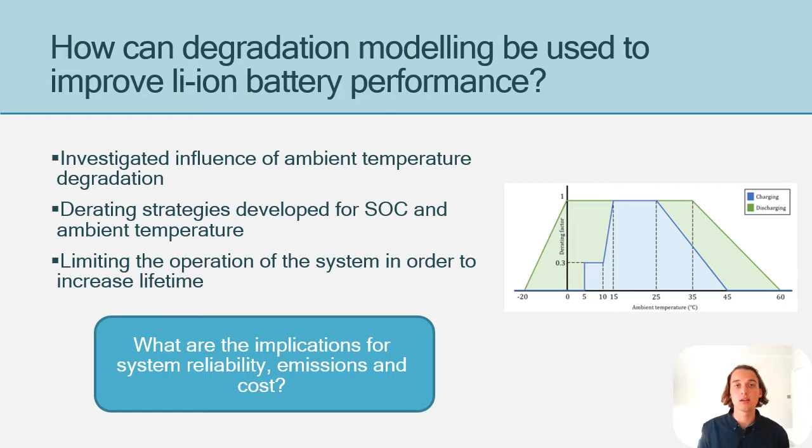When performing the degradation analysis, it can be seen that calendar aging, which occurs even during the battery's rest state, is the most significant aging mechanism. Cycle aging was found to be much less significant due to low currents in the case studies.

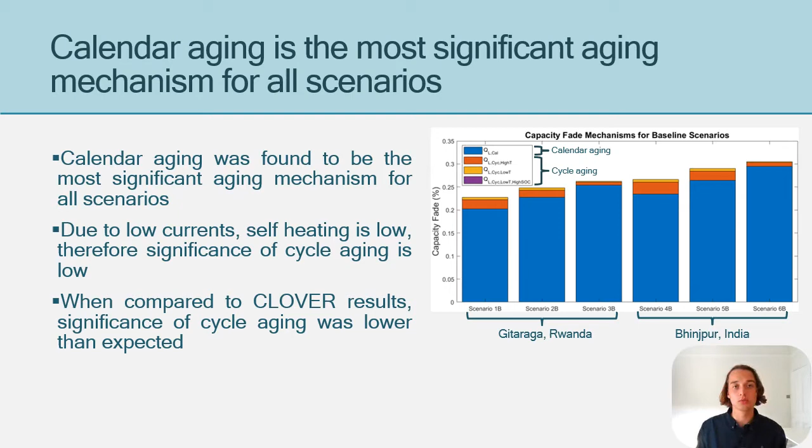When comparing results between the degradation model and Clover, it was found that Clover often underestimates and overestimates the extent of capacity fade. Therefore, it can be said that by including more detailed degradation modeling in Clover, more optimal system sizes could be achieved.

When looking at the impact of derating, it was found that state of charge derating was able to increase battery lifetime by over 11 years. This actually increased the end-of-life condition, pushing it outside of the 20-year simulation period.

When looking at the impact of temperature derating, these were less significant but still led to a maximum of 2.3 years lifetime extension. Increases in the unmet energy fraction and the blackout frequency were seen, however these are relatively small and did not impact the emissions intensity or the LCUE.

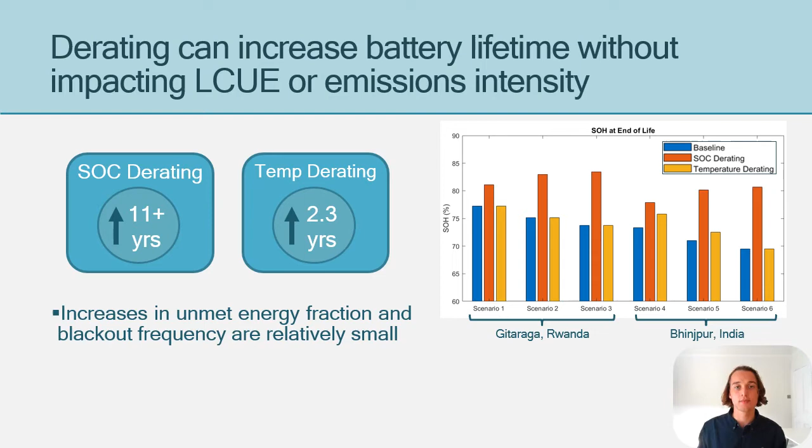Hi, thank you very much, Jake. So as Jake talked about batteries, one of the key components in mini-grids, my name is Matthias Jean, and I am now going to talk about demand forecasting in mini-grid rural electrification.

It is often very complicated to forecast what will be the energy demand of a school or a village which doesn't have access to electricity yet. That's why demand estimation is a crucial step in electrification projects, and improving it could lead to huge cost reduction by avoiding oversizing while improving system operation and reliability.

For my thesis, I worked in partnership with OVO Foundation, the foundation of OVO Energy, a British energy supplier, and Energy for Impact, which is an NGO helping the development of energy companies in sub-Saharan Africa.

Project JUA aims to provide electricity access to schools and clinics in the poorest counties of Kenya. The goal is to install off-grid systems with solar PV and battery packs to 320 institutions by the end of 2020. I had access to data from 170 institutions, which have already been equipped.

For every site, I have utilization data, that is the production, the consumption, and the battery voltage, and also objective data, namely the number of students, the number of patients, or the size of the school or of the clinic, etc.

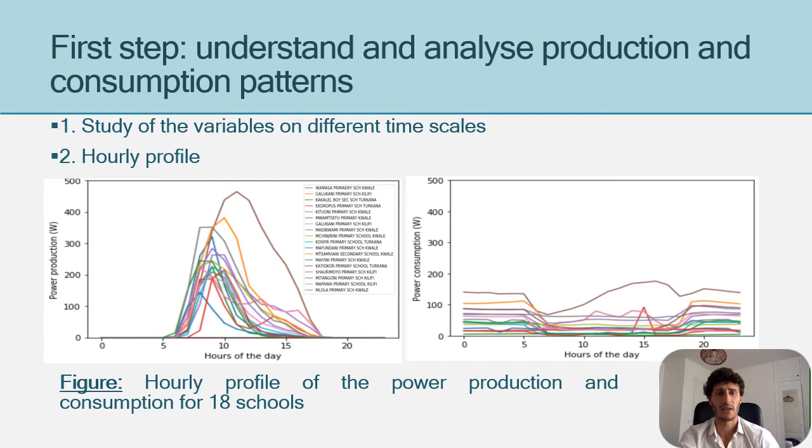The utilization rate is equal to the power consumed divided by the power produced. Depending on this value, the system sizing can be assessed. A small utilization rate means that the full potential of the installation is not exploited. On the contrary, a high utilization rate shows a great operation of the system.

It is hard to know whether the utilization rate is high because the system is correctly sized or because it's undersized. That's why it is crucial to discuss with the beneficiaries, to have feedback about the utilization of the system, and to determine whether the system is undersized or correctly sized.

The final idea of my thesis was to do demand forecasting. Indeed, for every institution, I had access to both utilization data and objective data. That's why the use of machine learning, which is able to link objective criteria with consumption data, seems to be relevant here. Due to the limited amount of available data, the results remained limited and experimental. However, it indicates a clear potential for future researchers with more complete datasets.

Finally, the study identified several opportunities linked to the utilization of data for electrification projects. It can be used to do fault detection, to quantify the amount of electricity wasted for every institution, or even to improve demand-side management of the systems. Concerning demand forecasting, further research with more robust datasets could lead to a huge cost reduction in mini-grid electrification.

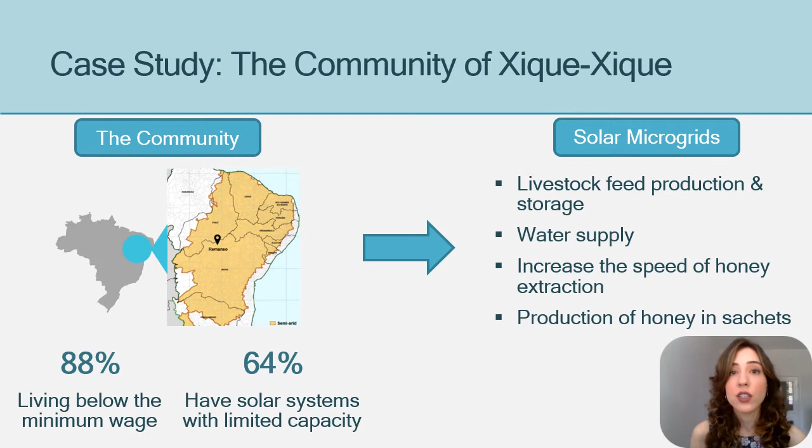This project will be implemented by the local energy utility, so they must comply with a series of Brazilian regulations which do not necessarily correspond to the most cost-effective solution. In fact, these regulations are focused on ensuring a secure supply to all consumers, requiring a minimum size of batteries and of the solar system.

So this will in turn have an impact on the other pillars of the energy trilemma, namely affordability and environmental sustainability. So the question I want to answer is: what are the implications of meeting these Brazilian regulations?

For that, I simulated three scenarios. The first with a solar microgrid using only batteries, and the second using batteries and diesel, both meeting the country's regulations. I will then compare these solutions with a third, an optimized case that would still meet the demand.

Also, according to the data provided by the local energy utility, I built two load profiles that will be compared to estimate the impact on costs of wrongly forecasting the demand.

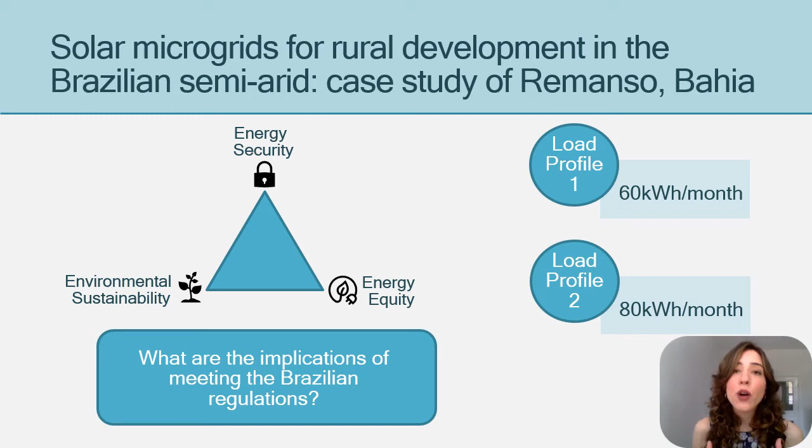Observing the results, we can see that the levelized cost of electricity when meeting the Brazilian regulations is much higher than the optimum solutions, with the initial investment for the system with only batteries being almost twice as much as the latter. So this may lead to delays in the universal energy access targets, or even a choice of system that would hinder the use of farming machinery, which is essential to produce economic growth in the community.

Now, considering the benefits for the consumers, the expected return can correspond to up to five times the minimum wage per farmer in a year, a value that is very significant for families in conditions of poverty or extreme poverty, which is the case of this community.

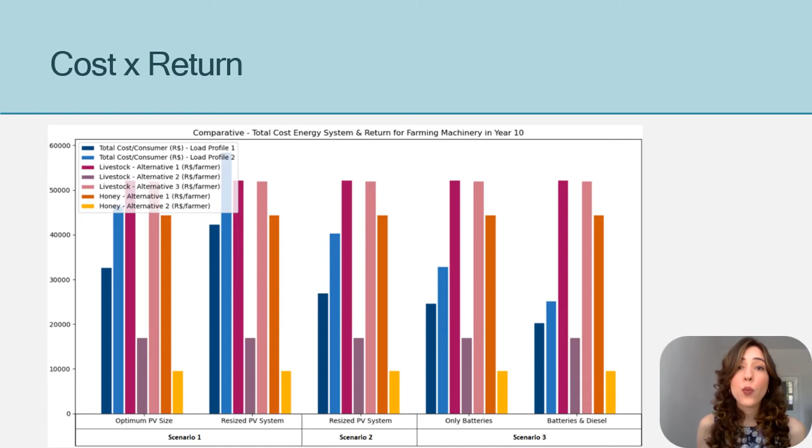In addition to that, the investment per consumer is expected to bring a similar benefit in terms of revenue for the producer, so it is essential that productive uses of energy are considered when designing the system, tackling both SDG 1 of poverty alleviation and SDG 8 of decent work and economic growth.

Interestingly, the best solution in terms of costs and emissions to meet the Brazilian regulations is the option with both batteries and diesel as backup.

This counterintuitive result occurred because the battery system is highly oversized, with an average state of charge above 50%, so the diesel generator will hardly ever be used. This refers to what Jake previously said about the trade-offs between oversizing the storage system and increasing its lifetime.

Unfortunately, this is a challenge for this specific case since the high upfront cost of having an oversized storage system hinders its development. In addition, when it comes to the risk of forecasting demand incorrectly, I observed a 30% increase in costs and emissions when comparing the optimum solutions for both load profiles, which shows the importance of using more accurate methods for forecasting demand, as Matthias previously mentioned.

And finally, the economic benefits for the consumers are considerable, but that can only be achieved if the government provides not only financial support, but also technical support to the community.

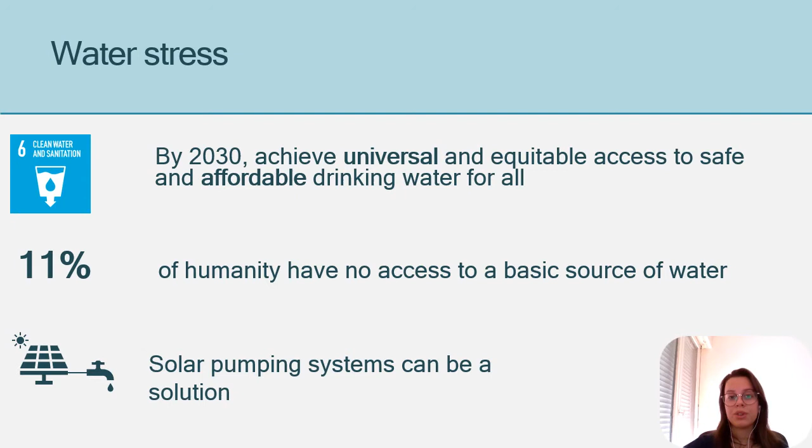The conventional architecture for a solar pumping system uses tank storage. There is a PV array connected to a motor pump, and when there is sun, the motor pump can pump water into a tank. People can collect water at any time of the day, even if there is no sun, because there is always water in the tank.

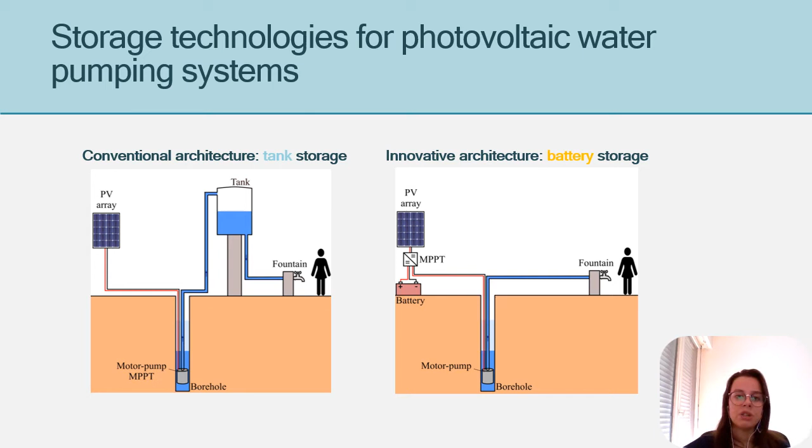I have studied an innovative architecture with battery storage in order to try to increase the accessibility of this system. In this new architecture, there is no longer a tank, but a battery storage bank. The population can still have access to water at any time of day, because if there is no sun, the pumps can still work with the electricity stored in the battery bank.

I have compared these architectures on 3 criteria. The first is technical: how these two architectures satisfy the water demand of the different communities. The second is economic: what is the life cycle cost of each system? And the last is social: what are the viabilities of these two systems?

So I performed a techno-economic optimization in order to find the minimal life cycle cost of each system while they totally satisfy the water demand of the communities. And then I analyzed the difficulties of maintenance of the different systems.

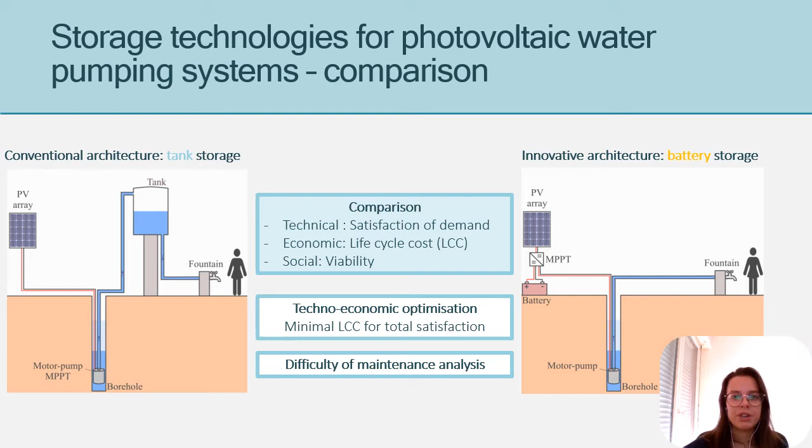I found that for the same satisfaction of demand, the life cycle cost of the tank architecture is 2 times higher than the life cycle cost of the battery architecture. This difference in price is mostly due to the difference in price of the storage devices, as you can see on the graph.

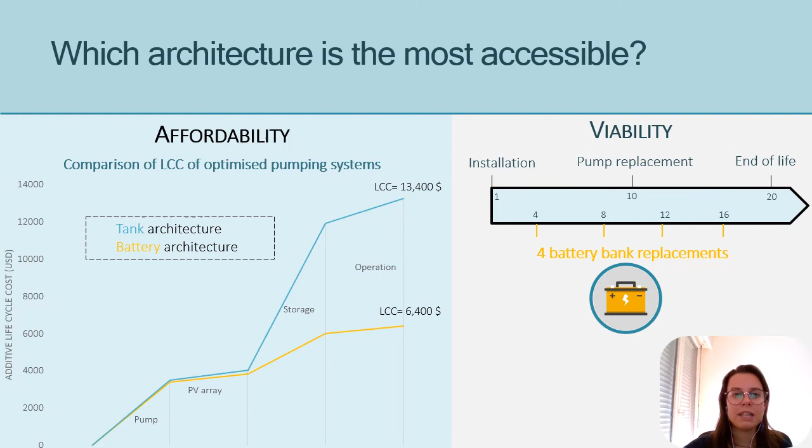So if we talk about money only, about affordability, the battery architecture is far more accessible for poor communities. However, we are not talking only about poor communities, but also isolated communities, and the use of batteries raises other challenges. We need to regularly replace the battery bank, in fact 4 times during the whole lifetime of the system, and if these replacements are not made, the whole viability of the system is threatened.

So the pumping system storing electricity in batteries can be 2 times cheaper than the pumping system storing water in a tank for the same satisfaction of demand. But the use of batteries raises viability challenges because of the regular need for replacement.

So in conclusion, it is necessary to develop operation and maintenance local schemes so the local population can take care of the maintenance and replacement of the pumping system. And then, with these schemes set up, we can use this innovative architecture and increase the accessibility of photovoltaic solar pumping systems and improve the water access of poor and rural populations.

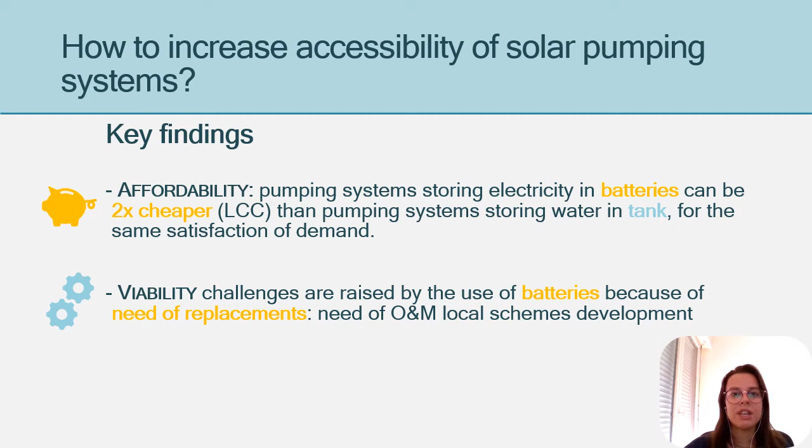Thank you, Camille. So now we've established that solar pumps are a great way to increase water access, especially in off-grid areas. What we now want to make sure of, because as Camille said, the upfront costs can be very high, is that they will last a long time once they're installed.

Now, how do we make sure that the solar pump, once it's installed, will last a long time? The main risk is that when you pump, you're going to extract water from a borehole, and the water level in the borehole will decrease as you pump.

We want to make sure that the water level in the borehole will always remain high enough to prevent any damage to the pump and to prevent any sudden stop in the water supply. The way we do that is we create something we call a borehole model that will model the response of the water level in the borehole to pumping.

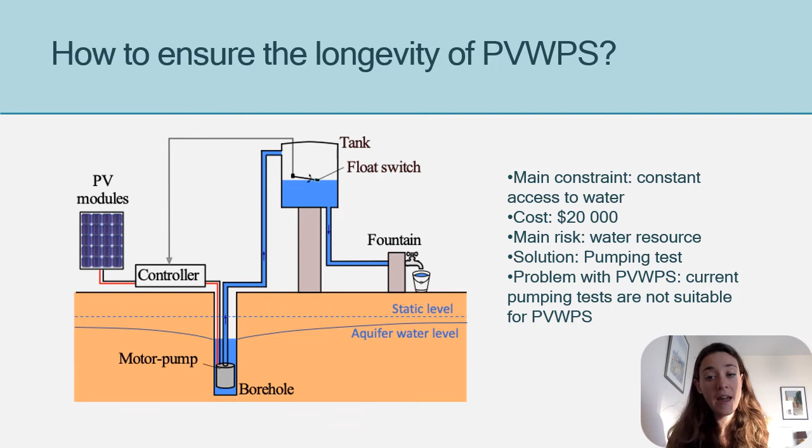The borehole models are created using pumping tests. You pump, you see the effects it has on the water height in the borehole, and from that you create the model. Now, because we already have models, why is that a problem for us with solar pumps?

Because of that, the models are trained initially before the solar pump is installed, but then it's just kept that way and never recalibrated, even though the borehole might change in behavior. The question from there is: is it even possible to use solar pumping data in order to train a borehole model?

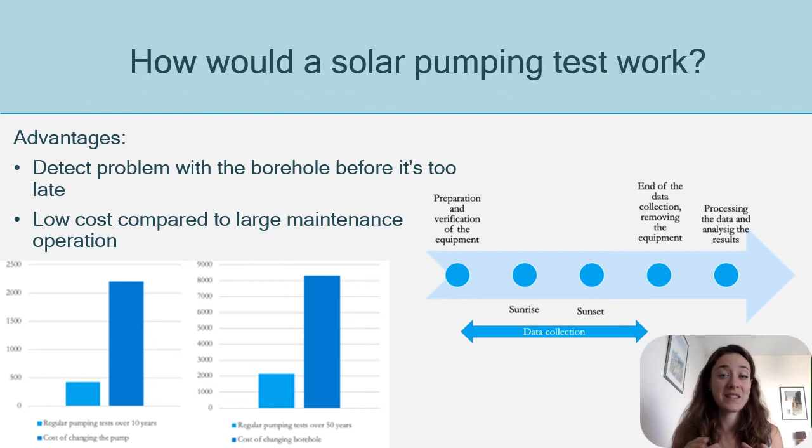He said he was considering organic solar cells as they are cheaper and greener to make compared to conventional solar cells. More importantly, he said that these solar cells could be made semi-transparent, which he thought could have potential in photovoltaic greenhouses that essentially generate power without compromising crop yields.

He was also interested in using these cells in what's called unassisted photoelectrochemical water splitting systems. These systems essentially consist of a solar cell and a PEC cell, which are connected in series and split water using only sunlight, thereby producing hydrogen, which can then be used for heating, power, or energy storage.

However, I found out that not much is actually known about how viable these semi-transparent organic solar cells are in these applications, which then spurred my research that looked into modeling the two applications to evaluate their viability.

So, for water splitting systems, I first looked into comparing the solar-to-hydrogen, or STH, efficiencies of systems that use semi-transparent organic solar cells to systems using opaque organic solar cells. For this, I paired 15 different solar cells to a PEC cell that utilized a popular earth-abundant material, hematite, in two different configurations: back illumination and front illumination.

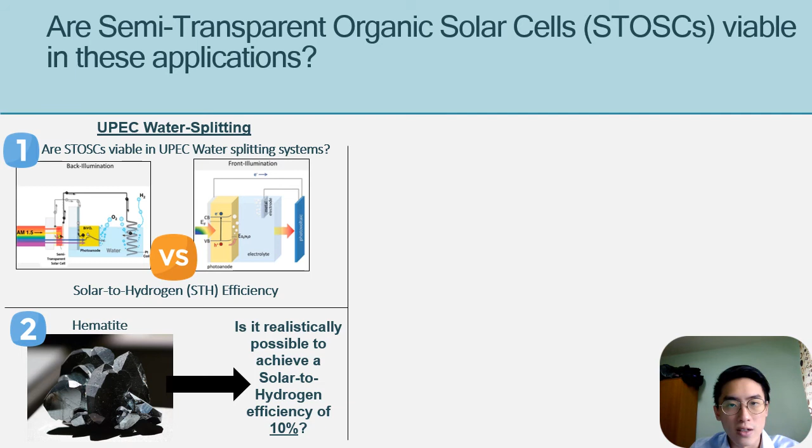I then wanted to see whether it was even possible for such a system to realistically achieve the 10% STH efficiency required for commercial feasibility. So what I did was I took the most efficient configuration from the first study and varied different parameters to see how good these devices have to be in order to do so.

As for the PV-greenhouse study, I basically modeled and evaluated the growth factor and power conversion efficiencies of 7 different semi-transparent organic solar cells and compared that against conventional PV greenhouse strategies which use opaque solar cells, such as CIGS or silicon, in a partial shading configuration.

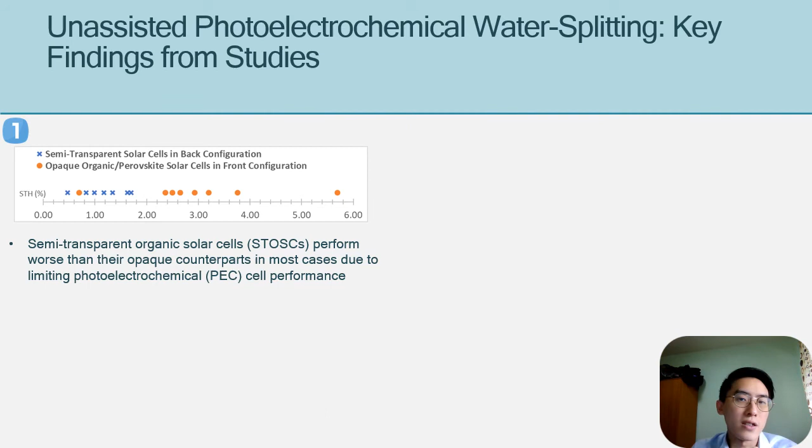Moving on, from the results of the first study on water splitting systems, I found out that semi-transparent solar cells typically perform worse than their opaque counterparts due to how sensitive the PEC cell performance is to overlapping absorption profiles between the two components. Systems using opaque solar cells face less of such a constraint, as sunlight reaches the PEC cell first in this case, allowing it to perform optimally.

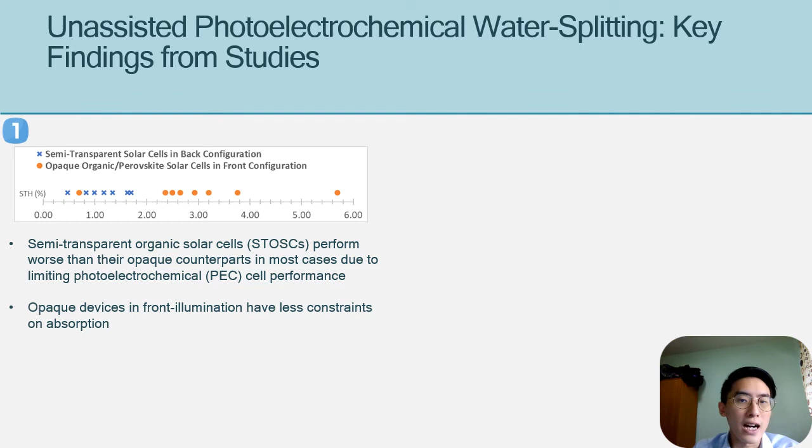The solar cells, on the other hand, perform suboptimally but are still good enough to achieve a better STH efficiency due to the generally high performance that solar cells have compared to PEC cells.

For the second study, I found that it was indeed possible to produce 10% STH efficiencies with a hematite-based system paired with either a single junction or a tandem solar cell. However, these components will need to have near-perfect properties, which would be difficult to achieve in practice.

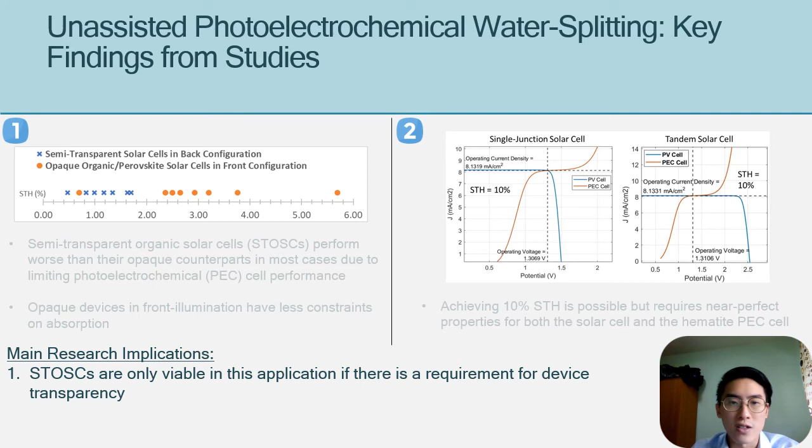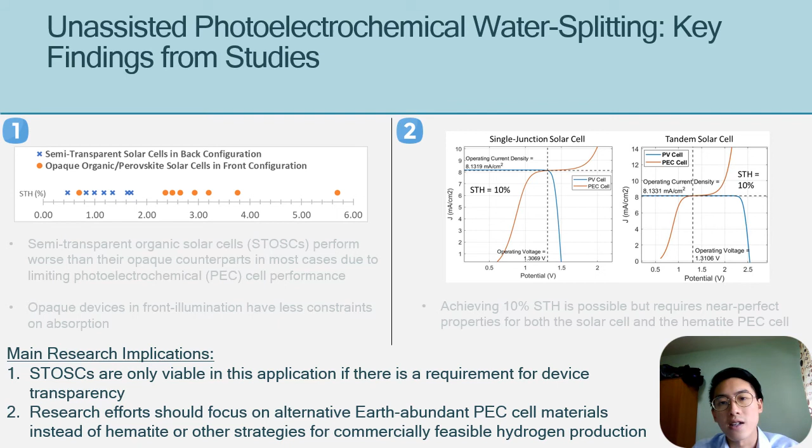Overall, this means that: 1. Semi-transparent organic solar cells aren't viable for such an application unless you need the entire water splitting system to transmit light. And 2. Research efforts should probably shift to a different earth-abundant material or focus on other strategies to achieve commercially feasible solar hydrogen production.

However, it was noted that with recent advances in materials, there seems to be a trend towards using more absorptive active layer materials, which makes sense from a power generating perspective, but by doing so, these layers must in turn be made extremely thin to maintain the same transparency, which is problematic for large-scale manufacturing.

So, what does this all mean? Well, it shows that semi-transparent organic solar cells are indeed viable in such an application, but moving forward, research efforts should focus more on increasing device transparency and manufacturability while maintaining a reasonable power conversion efficiency.

Overall, this gave Mark a lot to think about regarding organic solar cells, which led to him eventually consulting my colleague Daniel on the fundamentals of organic solar cells. Daniel will tell you more about this. Daniel, please.

Thank you very much, Wesley, and hello everybody. My name is Daniel, and I was also approached by Mark after consulting Wesley.

He was wondering why these solar cells were not present everywhere despite being such a promising technology. I told him that even though these cells have been known since the 1950s, which is quite a while ago, some of their fundamental processes are not quite really understood yet.

I'll guide you through my research that studies the performance of these cells at low temperatures. This has to be accounted for when considering these devices for the sustainable community in SEF land. As Wesley mentioned, their stability and efficiency are not even comparable to that of their inorganic counterpart.

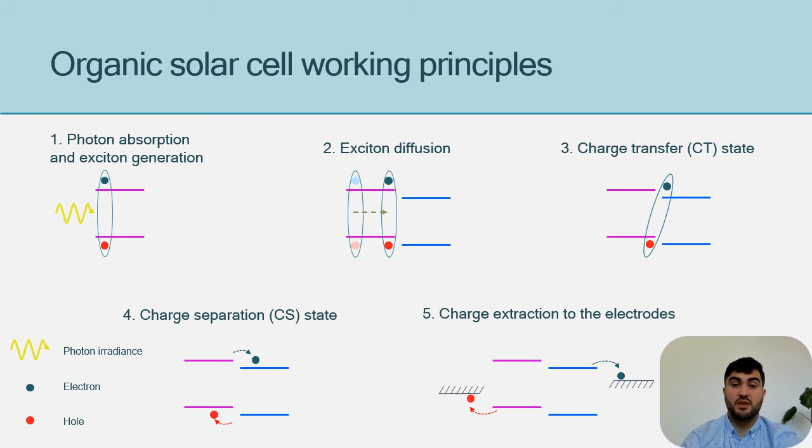So, how can I study these processes? During the last 3 months, I have worked with two techniques frequently used in device characterization.

Additionally, I modify a drift-diffusion model to simulate JV curves, whose equations you can see on the right-hand side of the screen. Despite this set of equations already seeming overwhelming enough, I have to account for the presence of the CT and excitonic states in organic solar cells, so I add 2 more equations to be solved.

With both techniques, I compare experimental and simulated data to infer valuable results. I take 2 different approaches to do so. First, I manually vary inputs to the model to reduce its complexity, considering several assumptions in different scenarios. Some inputs can either remain constant with temperature or can be considered temperature activated or deactivated.

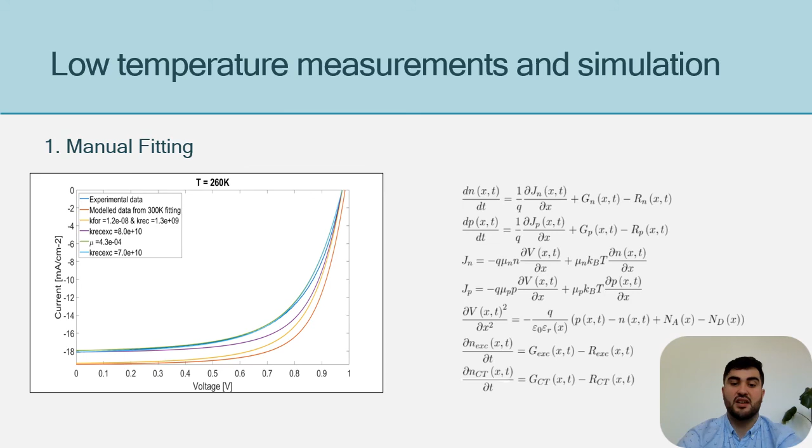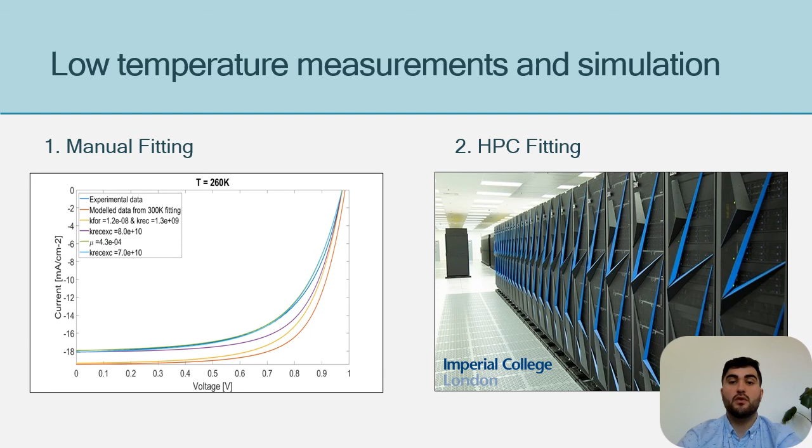In a second approach, I vary all the parameters over certain ranges reported in literature. I simulate over 1 million results in a supercomputer at the same temperatures and light intensities as the ones measured for H2D2, and with this, I look for solutions that can match experimental results.

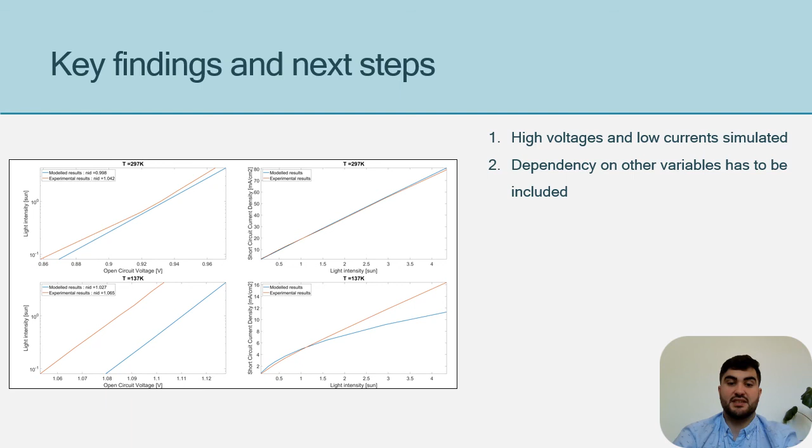Apart from that, some inputs of the model have to be considered dependent on other variables than temperature, like for example light intensity. It is also discovered that there is a direct correlation between the dissociation and recombination of both the CT state and the excitonic state.

Moreover, different sets of inputs can lead to the same solution, therefore uniqueness is not guaranteed. That means that without further constraints on the assumptions, 2 different solutions generate identical results. And lastly, JV curve fitting has proved to be insufficient to unambiguously determine physical parameters of organic semiconductors with the CT drift diffusion model.

Then, what can be done? First, bespoke measurements have to be calculated to properly fit simulation to experimental results by detailing more precisely certain parameters. Also, different materials should be studied to not lose generality.

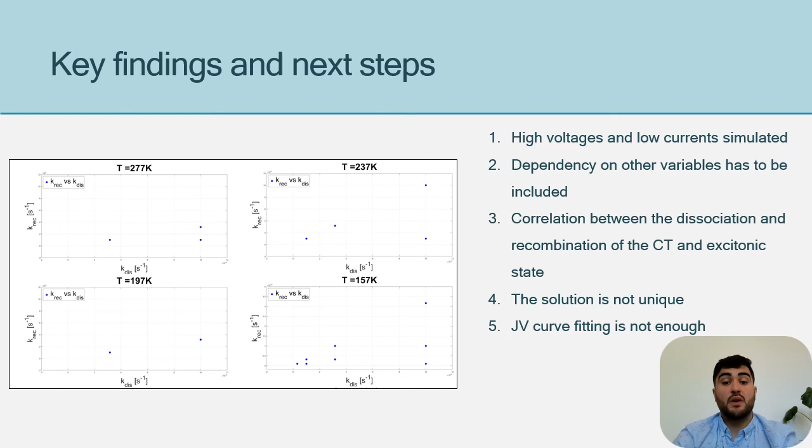Besides, the complexity of the model has to be further increased to account for other variables different than temperature and light intensity, for instance disorder and crystallization, which also affect photocurrent generation in organic solar cells.

So, what has Mark learned with all these projects? With Jake, he has discovered how simple strategies can be used to reduce the cost of mini-grids. Matthias provided digital tools to enhance electrification projects. Moreover, with Paloma, he discovered the importance of stimulating productive uses of energy when electrifying the community.

Camille and Anne helped SEFland on how to get easy, safe, and affordable access to water while doing it in a more sustainable way. Lastly, Mark became more aware of the viability of semi-transparent organic solar cells in solar hydrogen production and greenhouses with Wesley's insights, while I informed him about the fundamental limitations of this technology that condition its possibilities in SEFland.

Our projects have tackled several issues that could potentially help to reach the United Nations Sustainable Development Goals toward a more sustainable future. We hope that this could have given Mark some insight about specific measures and procedures to improve the life of the SEFlanders through technology development, in this case mainly focused on solar energy and particularly electrification.

However, this is only one of the many different topics that can be treated to fully address the issues that the people in SEFland are facing. For instance, our colleagues early this morning presented innovative approaches to decarbonize the transport sector. Later today, the Energy System Transitions Group will present different policy and financial mechanisms that can enable the transition from the current energy scenario to a more sustainable one. We hope that Mark can learn from these groups to improve the lives of the SEFlanders even further.